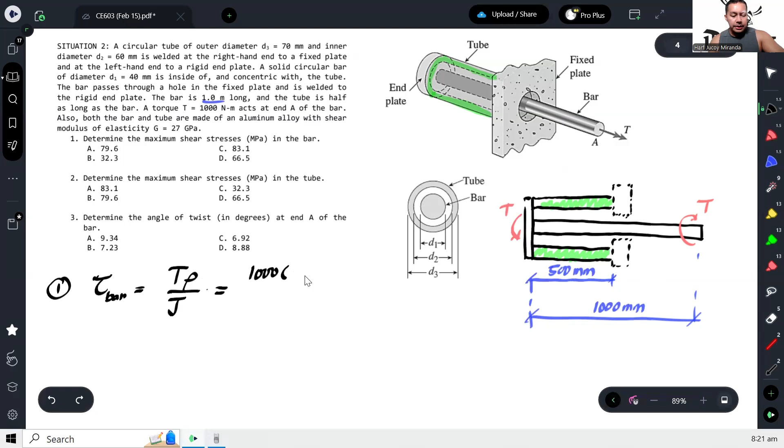Tapos yung rho natin, ito yung bar natin, so yung diameter natin dyan ay 40 lang. So ang radius natin is just 20. Or lagay ko na lang 40 over 2 over J. Pi over 32, take note, solid yun. So 40 to the 4th. So that will be the shear stress in the bar. Okay, and that gives 79.58 megapascals. Okay, so in the choices, that would be letter A.

Alright, next, determine the maximum shear stress in the tube. So sa tube naman, number 2, ganun din, T rho over J. Yung T natin will be the same kasi ililipat lang natin yung T dito sa tube. So that would be 1,000 times another 1,000 para maging Newton millimeter.

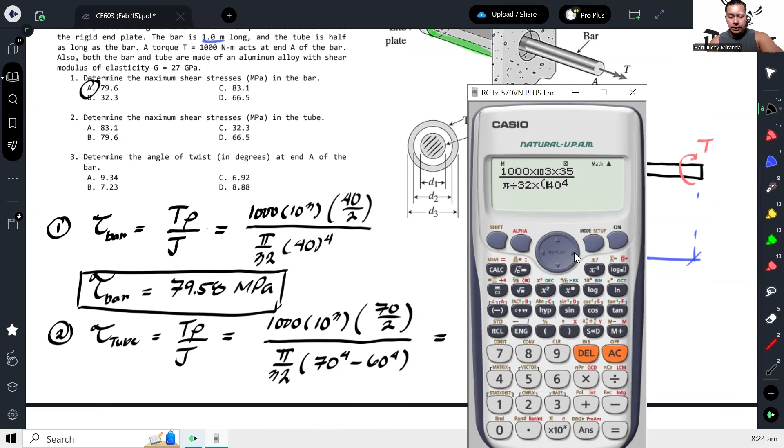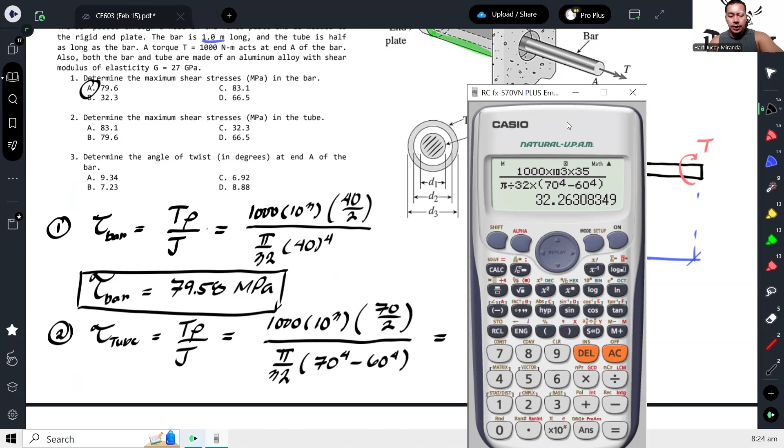Pi over 32. So take note, this time hollow yan. So outer diameter to the fourth minus inner diameter to the fourth. So ang inner diameter ay 60. So this would become 35, over pi over 32 times 70 to the fourth minus 60 to the fourth. So that gives us 32.26 megapascals. Okay? And that would be letter C.

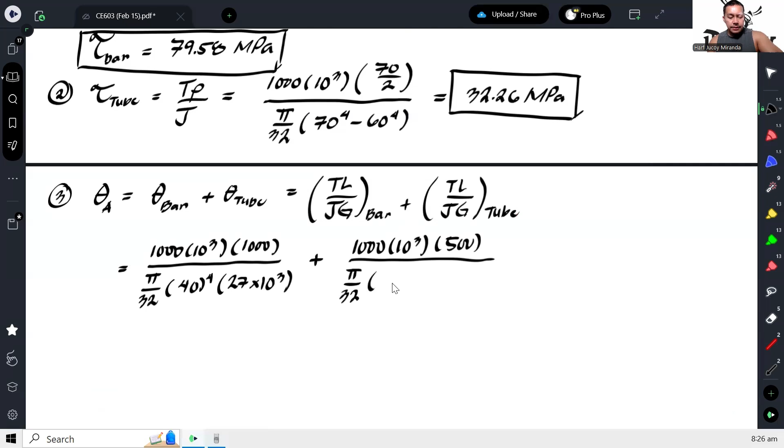Yung bar ay 1 meter in length or 1,000 mm over J. So, pi over 32 times, ang diameter ng bar was 40 to the 4. Tapos yung G natin, given naman, that is 27, so 27,000. Plus, ganun ulit, 1,000 times 1,000. Ang length lang ni tube ay 500, over pi over 32 times 70 to the fourth minus 60 to the fourth. And then same lang sila ng G. And that would give us our total twist at A.

Okay, and then plus. So this right here, 0.1644. Take note that this is in radians. Ang kailangan sa atin ay naka-degrees. So, para maging degrees ito, i-multiply lang natin yan ng 180 degrees divided by pi. So times 180 over pi, that would give us 9.42 degrees.

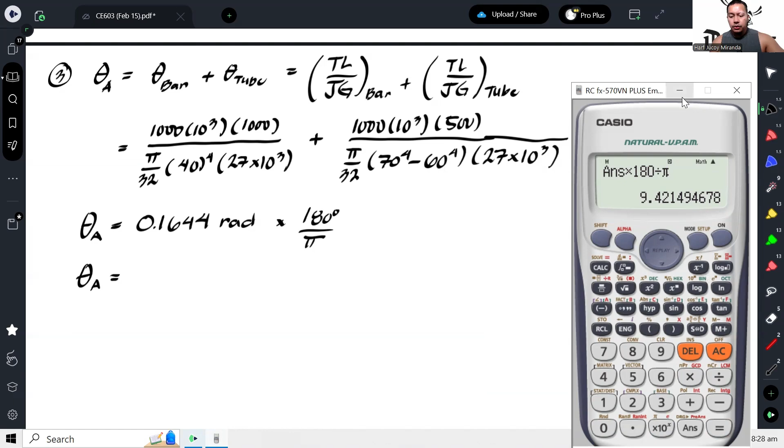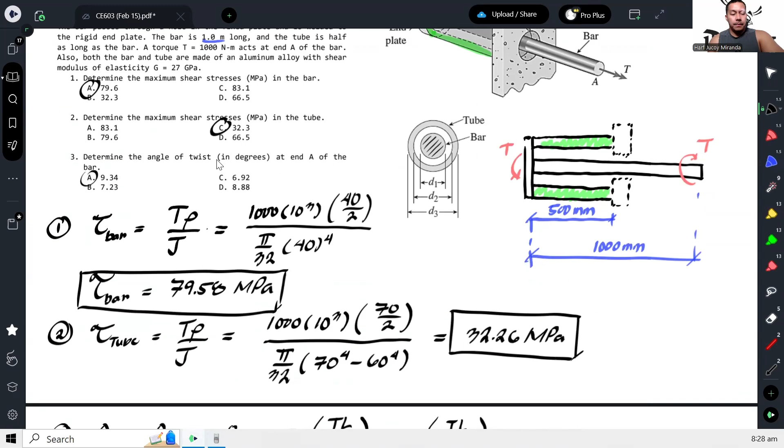Okay, so our answer here would be approximately letter A. Medyo may konting discrepancy lang. Okay? And that's how we solve this problem.